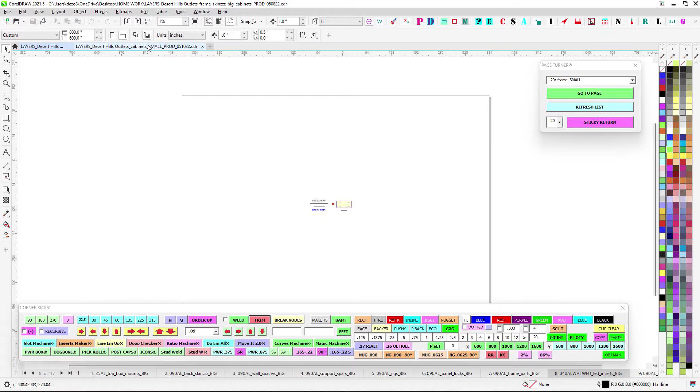When it came time to send the small ones out, I was able to fit all of those on one file. So to make the video, I'm going to work with the small frames, and everything's pretty much the same. I'll just point out the differences between the big ones and the small ones, but otherwise you can kind of get the idea on both.

So I'm going to use the small one basically. I'm not going to do a full lay of the land for the big ones, just for the small ones, and then know that it's going to be basically the same, except the big one got split up.

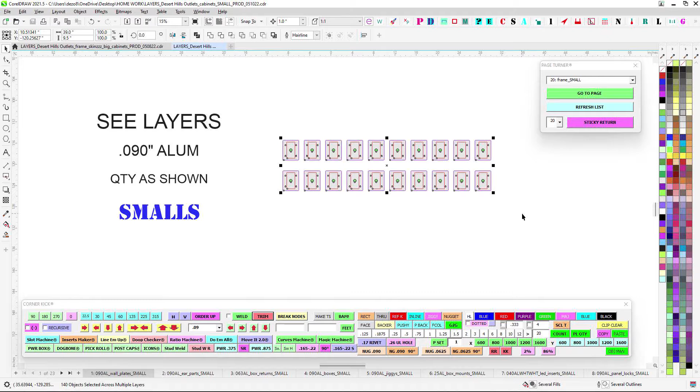So starting out, you're going to have wall plates. Again, these are going to be the same plates as the big one, so I'm just keeping it separated, but you can keep all of these together. I think you're going to cut the same 1.5 by 3, all the same, but just keep it out for both.

This is going to be the same ears that you have on the big ones, except these are in one piece because they're smaller, thankfully. So it makes it easy.

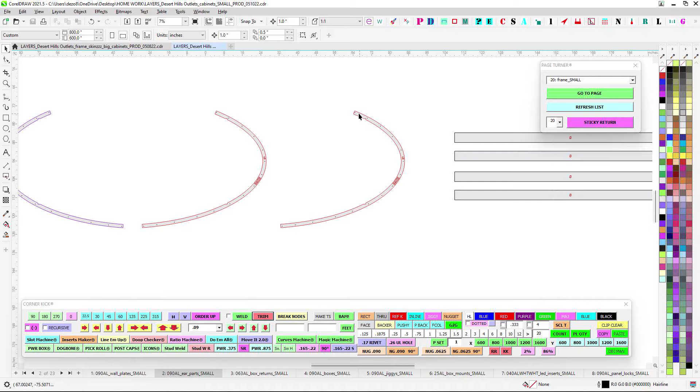Same thing though, while we're here, I want to touch on this. I don't know if I was totally clear — I know the PDF is very clear, but make sure these are lords to the back side of the main skin. Make sure don't weld on the front of this. You only weld on the back side because the front side needs to be clean, no welds, in order to be able to lords directly to the back side of the skin. So I just want to clarify that in case you didn't see that.

But anyway, so you've got your small box returns. These are for the little discs on the bottom, and we'll be going over what makes this one different. Obviously you got some teeth, so that's different than the big ones.

Same thing as the big ones, but again, all this fits on one file, so this is great. It's the same thing, except it's not seamed — it all fits in one, which makes it easier for you.

But you got the same notches and everything. And then again, we'll be going over the fact that one of these is closed in the back, and it needs to be bonded up and look nice because you can see it from the back.

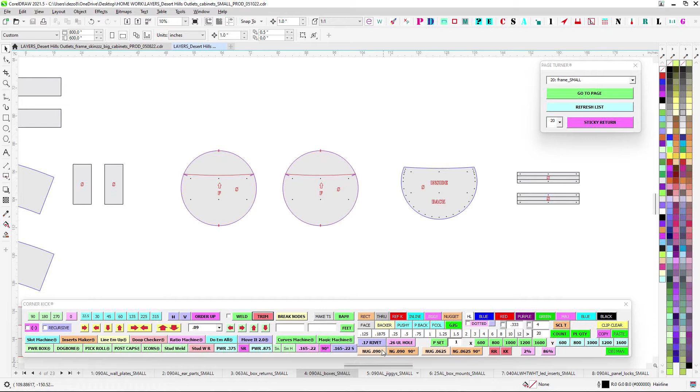Same kind of jiggies, there's just less of them because these are smaller. But the same kind of corner jigs and everything that you have on the big ones, so look for that. Same 1/4 inch that you got on the big ones.

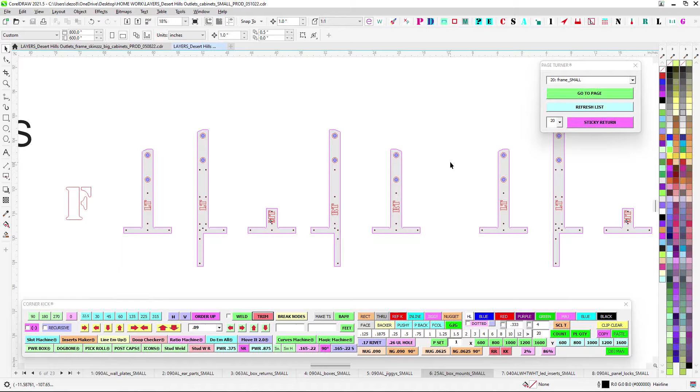I didn't really spend a lot of time for it, it's a balance whether you're going to spend all your time referencing. So obviously these are smaller. Jose, keep all this organized, and keep small parts with smalls and keep the bigs with bigs.

Same 040 white, very similar to the big ones, except they're smaller. And you're going to have the same panel locks, same thing as the big one, except these are smaller.

I think you're kind of getting the idea, you see the pattern here? Same thing, spars, there's just a little bit smaller. There's less of them because these don't need — there's not so much to support.

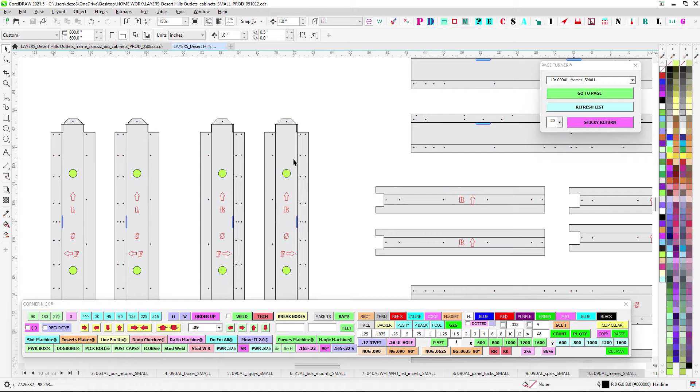And here's your main frames. Another thing that I noticed, in my haste, I do apologize for this — you're going to have to drill a hole in the verticals of the big boy frames because I didn't see that part of it. So in your verticals here, you're going to need to just put a couple holes to pass your wires through when you do your LEDs.

That's all. Sorry about that. Deduct 5 points.

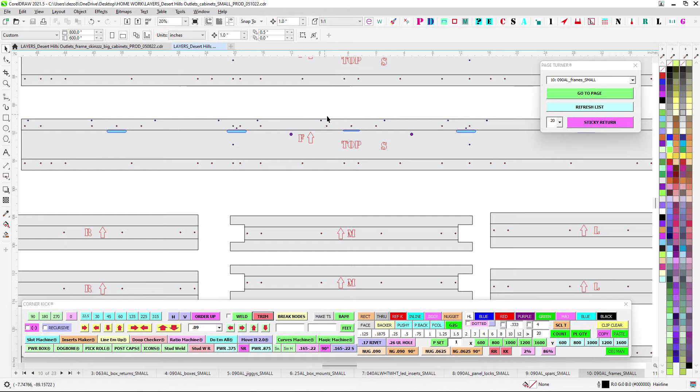But look for all these guys here. You got your verticals, your supports, your channels, all that. Look for bend scribes, faces, and make sure you got your ovals cut out. So when you go to clean them up, make sure they're there. If it's not there, it's going to have to be dealt with somehow, either reroute or you're going to have to cut them out. But don't bother prepping and bending something that doesn't have all the parts. Just make sure they're all there.

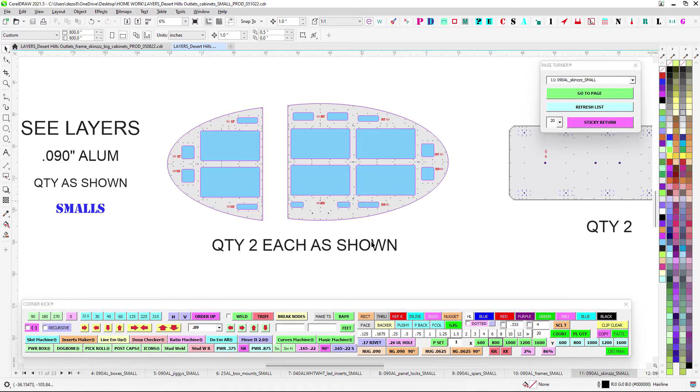Let's see. So this is better. You'll notice that the big boy is broken up into faces and skins that are in 5 total pieces because they're so big. So you have like a left, right, top quadrant, lower quadrant. These are nice because they can just be in basically 2 pieces and you're done with it.

So you got your main tracks. Again, I was waiting on sending the panels. The panels will be coming in, they are on their way, but we had to wait. So these are just the tracks, keeping out for these.

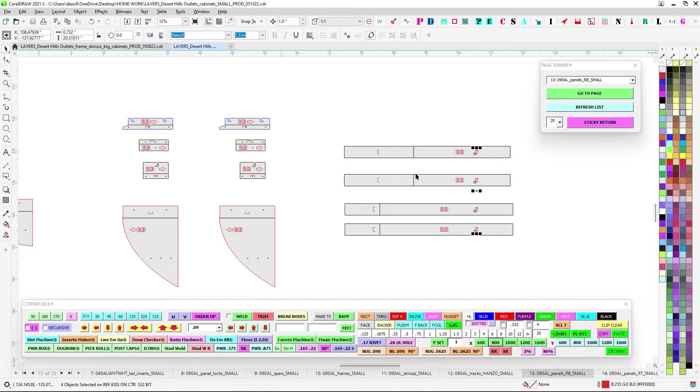Let's see. So these are the decorative panels, if you will, the ones that are weird shapes and stuff. So look out for the tracks that are with each one, right bottom and right bottom. So I kind of broke those up. I did put S on these because these might look confusing. If you just see this routed strip with that scribe, it sort of looks like the bigger ones as well. So just to keep that straight, I did do the S's on these. So S is small.

So you got the panels, you got the right top, that's the RT. Like I said, I broke it into the quadrants. This is middle top, so you can see that's the middle panel there. Look for MT, MB, middle bottom, and obviously that's where the little arrow circle goes. And then you got left bottom quadrant, and you've got your left top. So everything LT, and again, look for smalls.

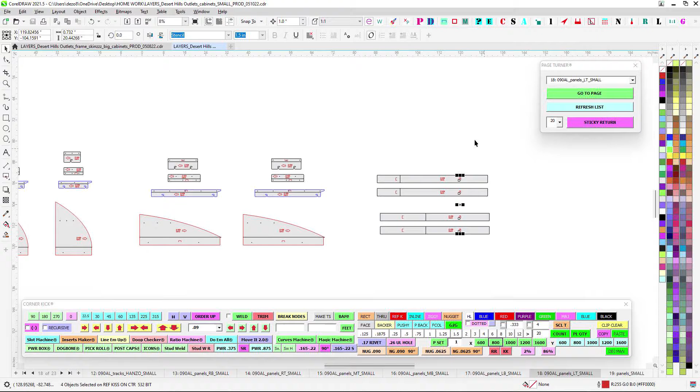That way you don't confuse the other ones, because everything's 3 inches deep, so the depth is the same. If you had a pile of these, it might be a little confusing. All right, so here's the panels. Now again, the panels here are just smaller, but the big boy, the exact same thing. So just go to town on this, or go to school on this, and then you'll know what's up.

Let's see. Do I want to talk about the panels first? That's fine, these are separate anyway. So you can weld up, let's talk about just welding up the panels. So you have your right top and your left top. You can see where that's LT over here, and you've got that right there, and then they just mirror. So I gave you one side to bend.

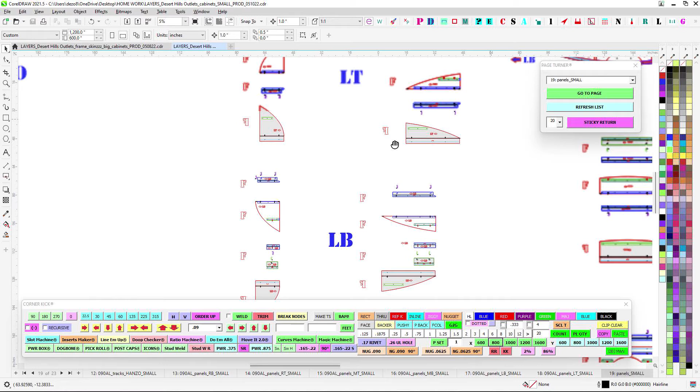So let's say your left top here, you go ahead and just bend that, and then, oh, looks like I missed the scribe mark on that one. So you just know to grab that, just like I told you on the video. So just like your other ones there. Yeah, looks like it, yeah, so I missed them.

Anyway, so you'll bend those, and then you'll just reverse channel these. You can bend that, and then I gave you an inch long and an inch long on all of these. Inch long past that, and an inch long past that, and then just cut it. So that's all good there.

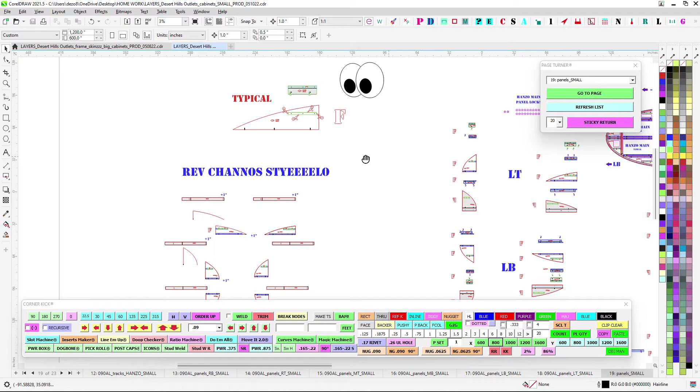And then on the ones that are this outer perimeter, you can see where I have this in green. This track is in green, and then it has the red screws versus the black screws here. What you're going to do there is, because there's not going to be, you can see this is the strap right here, and on the small one there's only 1 inch, and it's 3 inches deep, so there's no way to get to the hardware. So on the Hanzo main ones here, you're going to have the main track, and you're going to rivet it down, and then you're going to have these screws that slot in, just like the tester, right?

You saw the tester, you can mess with it, you'll see what's up, right? So all of these are like conventional. Screws are in the face permanent, and you just slide it on, clunk.

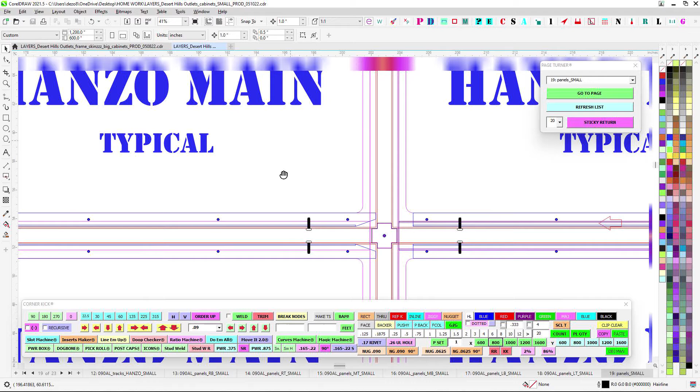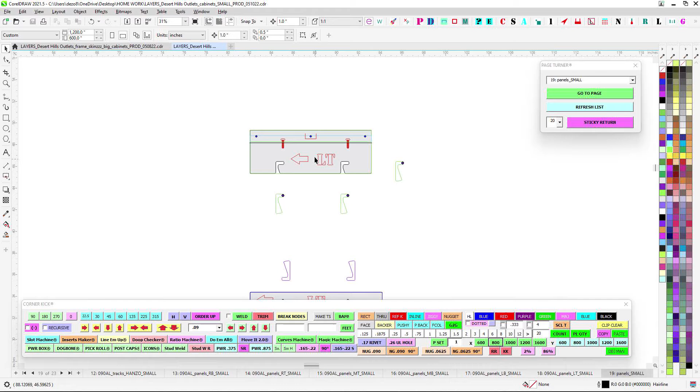But because these are basically concealed, no access, they're flipped around, so this track has the groove in it, but this track does not have the groove. The track that you rivet to the face is going to have the screw sticking out.

You'll see where this track, or this one that gets stuck to the inside, has the grooves. So the track that gets riveted to the face of the cabinet has the grooves, and this will have the screws. But the top thing here will have the groove, and the screws will go into the part that goes on. So all these ones that are green, the main skin or the main frame, will have screws sticking out. And these panel boxes will have screws on the bottom, but no screws on the top, and it'll have grooves.

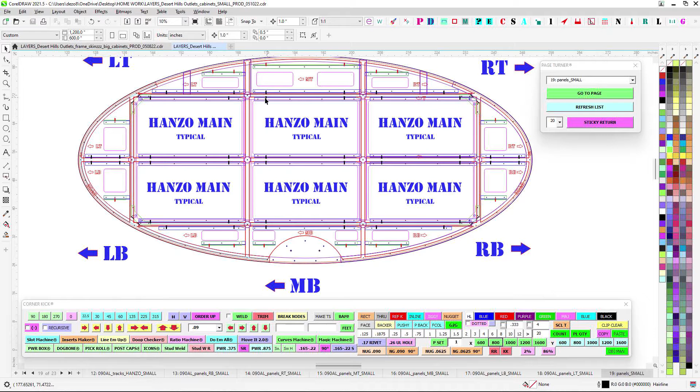So it'll be a mix-match hybrid of grooves and screws. The main panels are all screws with the grooves on the actual— I'm going to say screws and grooves a bunch more. Anyway, so that's the idea. So all these perimeter ones are kind of funky in that way.

You can see it's the outer track that gets the screw on the actual frame box, and then the panel little box gets the groove. So to show you there, all you're going to do is Cleco it, and to keep it quick—because you're already bending this and it's going to already sort of warp it like a reverse channel letter—you're good to just Cleco this in spot and then work your way around.

But just make sure the track is to the outside, right? So you'll have the track here and the track there. Just make sure you don't put it on the wrong side and have it on this side, and then we're all really sad. So just work your way through.

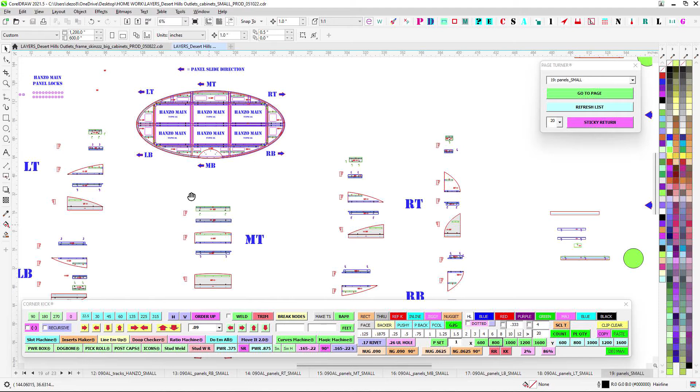So all of these perimeter ones are all that way. You're just going to clamp, bend, and then go ahead and finish it off reverse channel style, and then Cleco this in spot and kind of tack it all the way around, make it sexy, and then we're good. These are out to paint.

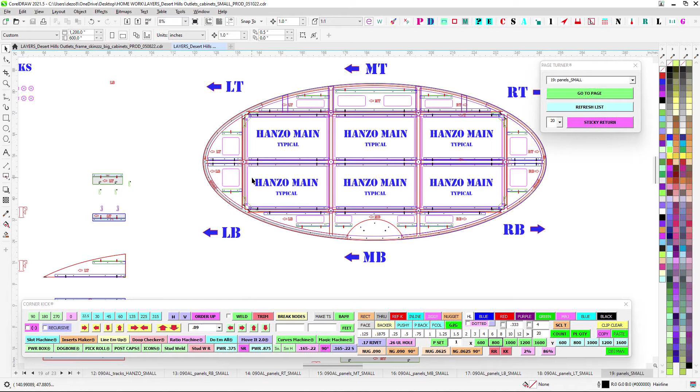And then just get all the other tracks bent. So like I say, anything green gets attached directly to the panel. So that's that. So go do those. That's for the big ones—the little ones, this one has a little more work.

You're going to bend this top side, and then you're just going to work your way around. This skin is in 3 different sections. So let's see. Yeah, so like this top one here, the middle top section, you just bend and kind of curve it, and that just takes care of that.

But this particular guy here, he's in one piece and then another piece, and then he's got these little side pieces here. So—

All right, let's talk about the small frame here. So the frame is going to be what you know, it's just going to be C channel. Just make sure all your faces poke out, your faces go to the face and all that.

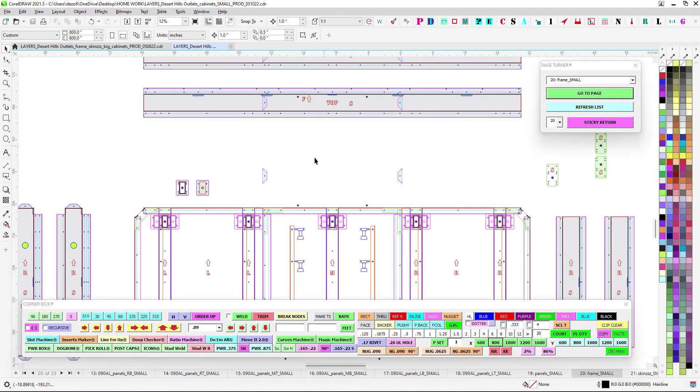And then what you're going to do is you've got mid verticals here that are C channel, and then you have your outer perimeter there. And then like we do, you've got your backer pieces that go to the back—that's where the mounting is going to happen. So that's these pieces here, but they're serving double duty.

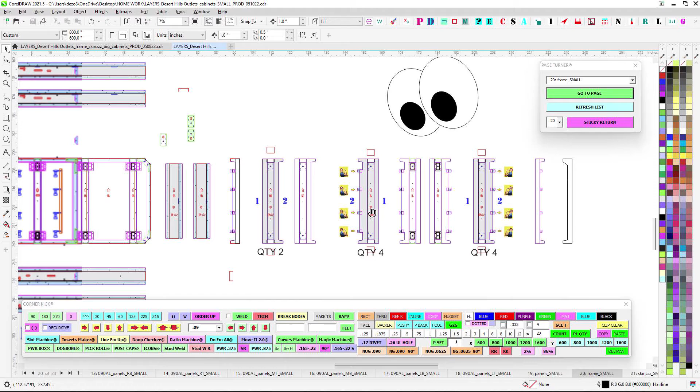Not only are they the mounting pieces, but just like Loma Linda, you're going to bend these tabs, and these tabs are going to be where you put your LEDs. So if you look at this orange here, this kind of mimics where those holes are going to line up, so you're going to bend them.

So just make sure the right side is the right side, and those tabs will bend facing into the sign. And the left side, same thing—the tabs will face and bend to the inside of the sign. So there's just a mirror.

Now, because this bigger frame is big enough, it has 6 verticals, and the 2 here take care of it. Because this one's smaller, this middle brace you'll see here does not have all of this on it—but that means there was no way to support.

So once you get this frame built, you're going to go ahead and lay the backer on. And then once the backer's on there, since there's clearance on the back, you can just rivet these two basically C-channel struts.

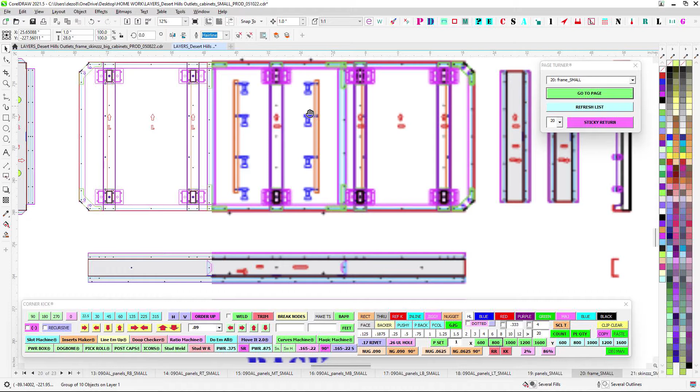Let's see, where are they? Right here, these guys in orange. They're just basic struts. But these two, once you rivet those on, just make sure this one faces in and this one faces in. That will mimic the same spacing for the white on whites, so we just have to dummy up their own little white on whites there.

But anyway, so you've made these. The backer jigs are just flat, look for the chamfers. They go to the inside, mounting holes and all that. So you just put that in there, basically like a C channel.

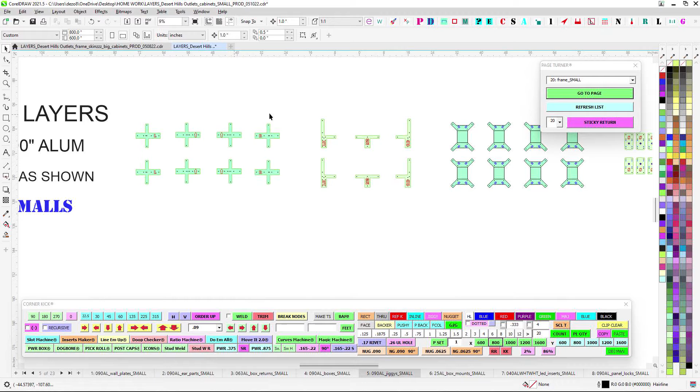So you get that up, get that built. You got two sets of jigs, your back jigs and your front jigs. Let's see, I might have to investigate these jiggies a little bit. Yeah, we got the face jiggies. Yeah, I owe you some middle jiggies, middle back jiggies, because we got these ones here, but we got to modify these. All right, so you'll be getting those. I'll get that handled.

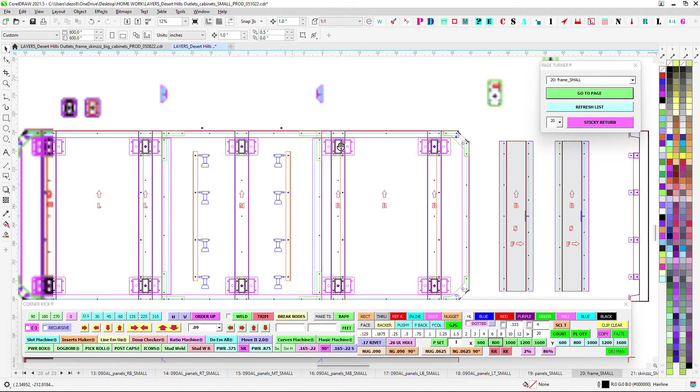So for the backer, or the actual mounting pieces, what you're going to be doing is chopping 1-inch chunks of 1.5 by 3, making little feet. This is the same for the big ones as well. I just broke it apart, but when you set the saw, get both quantities, quantity 22 here, and I think quantity 26 or something for the other one.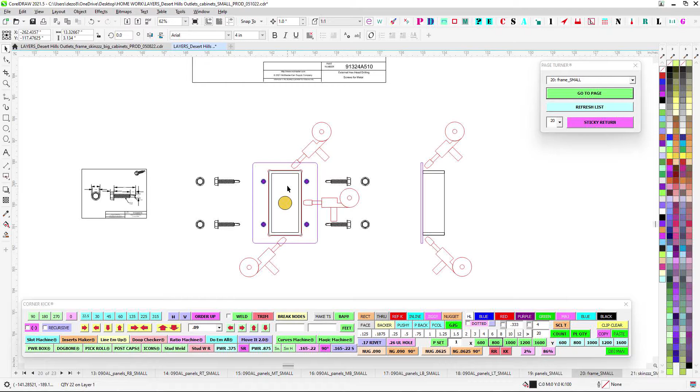So add them all together and cut them all at once, save that time. And then what you're going to do is just line them up and tack it / burn it. Don't weld all the way around, it's not necessary. Just make sure it's on there nice and strong, but it's fine because it's just going to be clamped.

So then what's going to happen is this is for install, because this is really a retrofit and there's a lot of retro still there. And the fit part is this, that's the questionable term there. So the idea is that from the inside of the sign, you will 1024 self-tap these

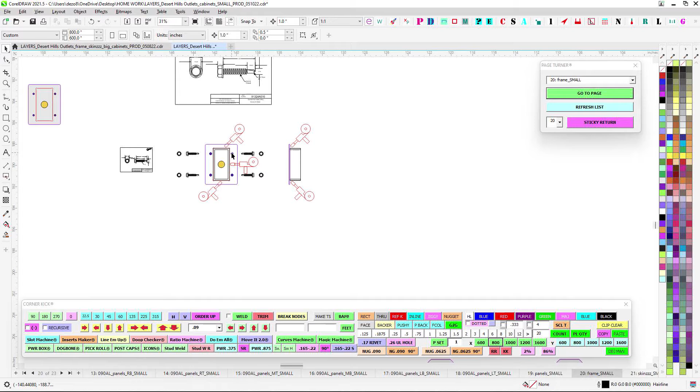legs onto the back of the sign. And then that will allow for adjustability, because when they go to put these cabinets inside the existing cabinets, there's all kinds of nonsense in there, and it could actually have a lot of stuff in the way.

Let's see, I thought I had a side view of that. There it is, way over here. So anyway, this will be your 1.5 by 3 with the 1 inch leg, and then you'll go through the strut and everything, and theoretically, if everything's cool, that lines up perfectly like that.

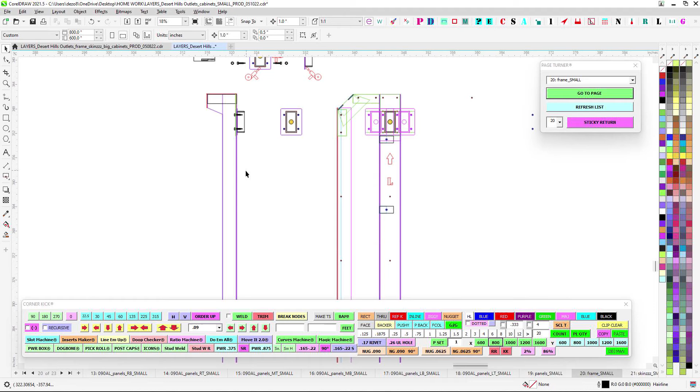But I went ahead and made 2 holes over here and 2 holes over here. That allows for this plate to slide over and reinstall on the fly. So when install goes to put this up and there's a bunch of junk or something's in the way, or there's some sort of strut or something. The reason this is 1 inch off is it has to clear over a bunch of stuff already in there that's about 1 inch tall.

So anyway, that's why we're going through this, but I went ahead and standardized it for both signs. So you're just going to weld up those plates, and theoretically they'll start where they're supposed to be, behind the mounting hole. But install will have the ability to change that placement with these holes here, should they get out there and see that, or if they have to, they can move them over even more and just on the fly self-tap it against the back.

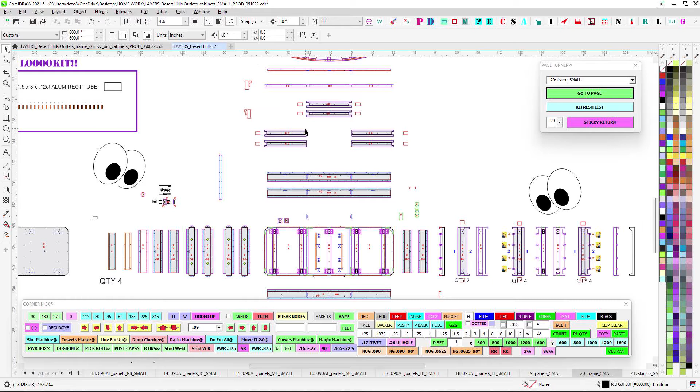So that's why I didn't want these permanently put in spot. We would just permanently attach them if we knew exactly what was going on. So anyway, just trying to give as much adjustability and modular action there. Once you get the frame on the back side all done, then your front jigs will have all the different sticky outies here, that's a technical term.

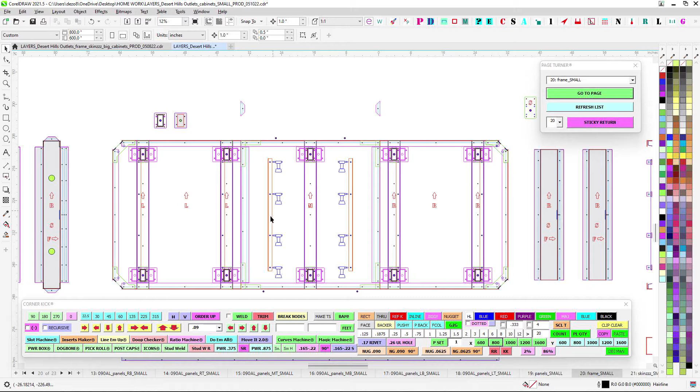The sticky outies there will allow you to mount your C channels for the faces, for the tracks. That's in the middle here. So you'll go ahead and attach those and weld them up. That way you'll have your main pieces here that go to the back, that's the main frame. In between is just a C channel on the face that allows you to put track and mount the actual face. So you work your way around there.

And then the front jigs will have the spars sticking out, ready for the spars. Now the spars are up here, they're all labeled - your left top, your right top. What this does is give the ability to support - you can see in purple right here, that's going to support the face that juts out.

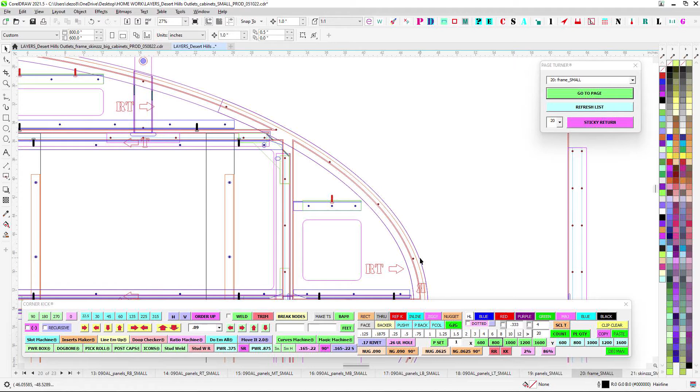So you're going to take that spar, attach it - you see it there in purple. You're going to attach it to the jig back here, and then just like the inside struts, you have one leg that's really long, so make sure you bend it one-two.

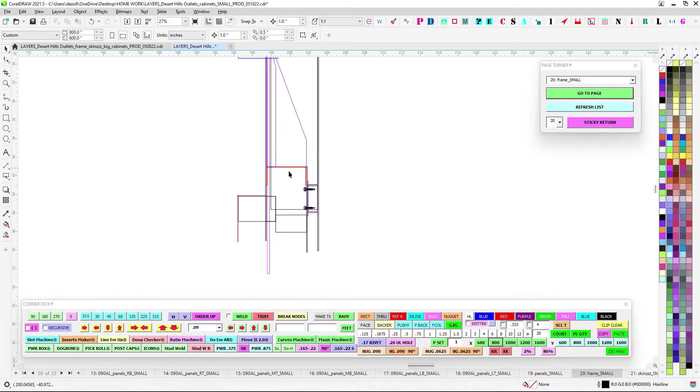And then you can see here in purple that this spar goes all the way back across the entire frame. So here's the one-by here, and here's the big long leg. Get in there and make sure you tack this nice to the frame, and that's going to give the rigidity necessary to be able to lift this thing, because you're going to have to pick it up around this perimeter, and it would just fold right up.

So this spar is going to be doing work. Make sure that spar gets attached really well to the frame. Go ahead and tack it up nice in there. And then also you can see where that supports the track and all that - these spars are doing work.

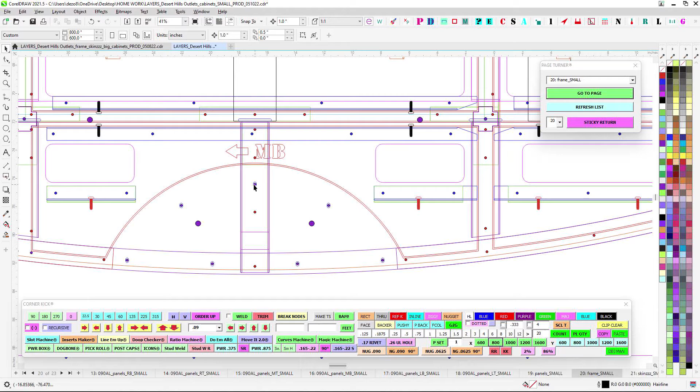Same thing here, this spar comes down, kind of supporting this. You'll have a middle spar comes down, gives structure, and you can see where it'll help support the circle, give it that strength. So anyway, you're going to do the track, you're going to do this frame, you're going to do the middle C's, and then you're going to have these spars sticking out, and that's kind of what you're going to end up with.

These spars are just beefy, they're on steroids because they have to hold up the whole cabinet up top. They'll have that weight, that's why these are beefy quarters. The rest are just 09. It's fine.

While you're here, get that in there. You go ahead and hit that up with the 5/16 steel riv nuts. You'll see where it's recessed a little bit, so it's flush, and that's how the big box will get mounted on there.

So once you have your struts, everything's on there nice, everything's good, then that's when you can go ahead and Lords on the face. And you'll have plenty of real estate to Lords like this one here - that's a nice 2-inch wide. You'll just Lords that really well.

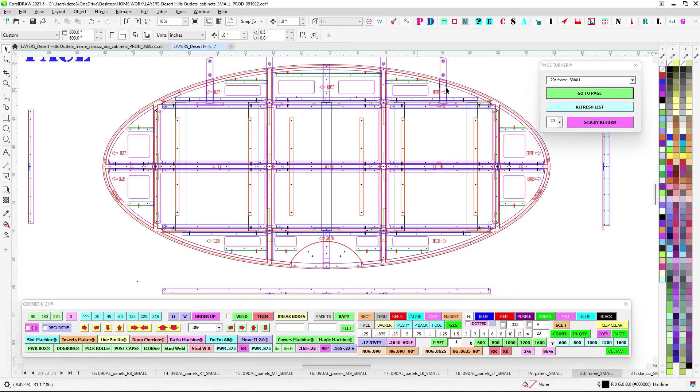Just go all the way along, Lords it up really well, all the spars, and then go ahead and lay your faces in there. Again, when you're doing the big one, it's going to be in multiple pieces, so pop Lords, have buddy system. Make sure you got plenty of Lords. Don't let it kick off on you.

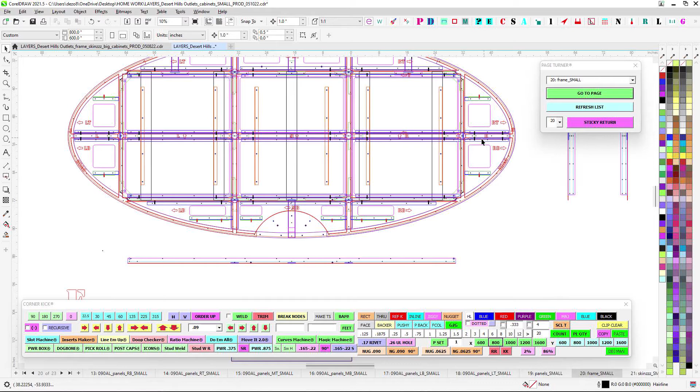We're getting into the hot season when it's triple digits, that Lords will pop off pretty quick. So just be ready, lay your piece out, test fit it first, then lay your piece somewhere so it's ready to grab quickly, and then go for it. But just, you know, you've got to hustle. So anyway, get all your skins on there.

Lords face up, like I said. And then once that's all on there, then you're good to go. Then you can start laying on the tracks.

Get your tracks all bent up, and then you can decide how to do that. But you're just going to rivet all your tracks on there, and make sure that you put your screws in first on some of these that are on the top here, because they can be kind of tight. But I think you can get, let's see, that's 6 inches, so you probably could get the screw in there okay with a gun. But if not, like these blue ones here, maybe shoot your screw through first, and then you can rivet it on, and then that way you're good.

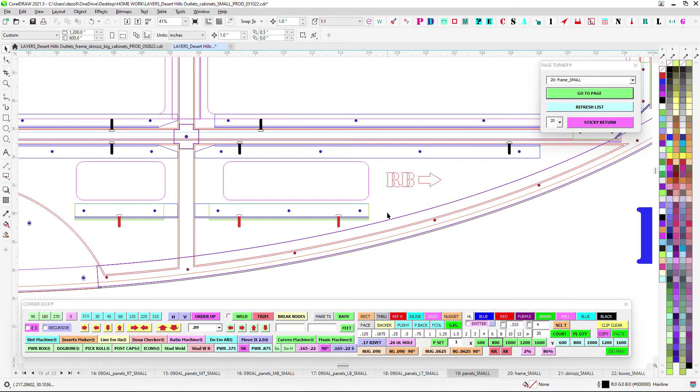Again, use those Torx ones. Bring in a bunch of those. These are that way so people aren't tempted to just pop them out, because that's not the idea. These stay in permanently.

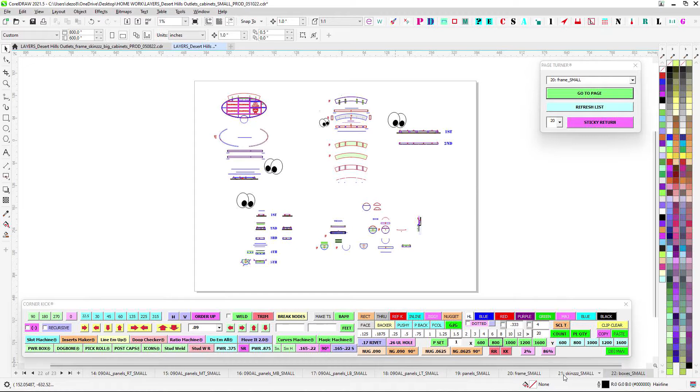Okay, so you get that. Where are we at? Take the skins, you're good there. Hammer on all your tracks, then you're good there. Get your boxes made. And then once your skins are done and your tracks are all on and everything's looking good, then you can go ahead and do the ears, I call them.

You'll have already welded those up on your table. Like I said, you'll just put them on a 3x3, weld it along the back. This is where I was hoping you'd catch that. Do not weld on the inside. It's only on the back. The 3x3 side, leave clean.

Then you're just going to Lords really, really well all the way on there. And then make sure it lines up. I test fit it, obviously, because this is going to warp a little bit. So you might have to kind of adjust it, kind of get its attention. Make sure it fits, though.

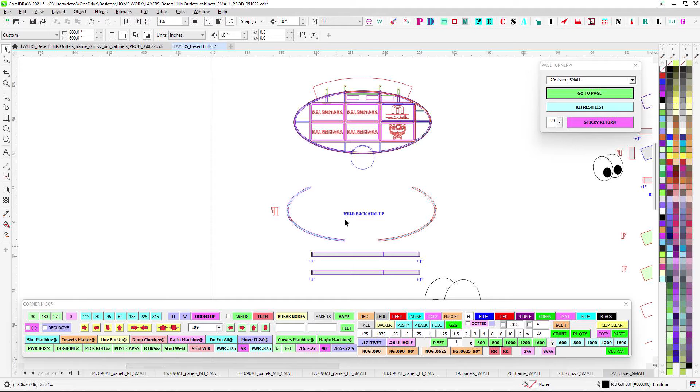And then you can go ahead and Lords these on next. So get all that skin on there, get your tracks, put these on, then you're good to go. The boxes and the circle do not have to go on in the shop. Maybe do a test fit, make sure everything fits. But you're going to send those out to paint separately, and they are also going to be installed separately. That's the idea. That way we don't have this hanging off there and getting bent or damaged.

Same thing here, it's all modular. So just like your big one, like I said in the video, you're just going to put it face down on your table. That's your first shot there. Tack it all along the back. This one's on 4x4s. And then you can flip it over and strengthen it up and get inside there and weld all around and make sure the inside seams are all welded up nice. And then that's it, box is ready to go.

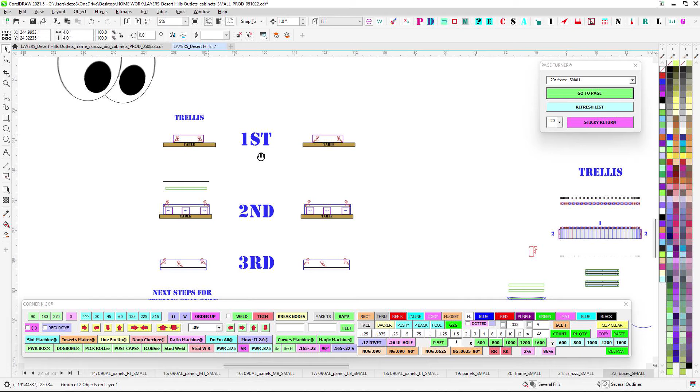Now, again, just like the big one, you've got your first, second, and third steps. So you're going to take the top skinny piece, and the face up backer, and you're just going to put it on your table, line up with the bend scribes there, or the reference kisses. Get that reference kiss here lined up there, and then go ahead and burn that on your table. Make sure it's as flat as possible, because it needs to be flush.

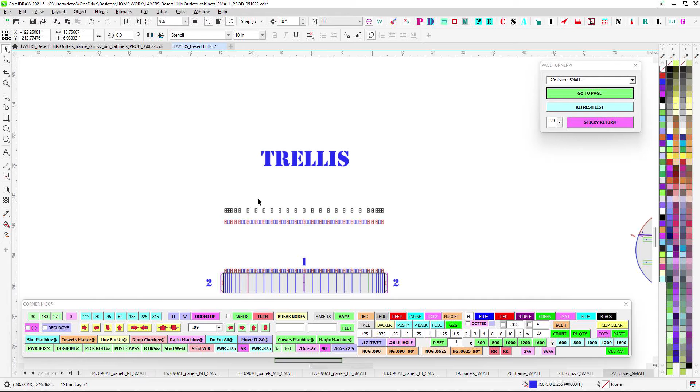And remember, it's on the outside. It's not reverse channel letter style, it's on the outside. Then you're going to flip it over and then put it on the 4x, and then that is your piece here and your piece here. And then the same thing, you're just going to line up that with that reference kiss there. And then just from the back side, go all the way around, you're good to go.

Except on this one, whichever one, it doesn't matter, but you'll have the flange coming out an inch. But you'll just have to tuck under, it's fine. But you're going to have the teeth. And then you'll do the third thing, just like the other one, flip it over, seal it up, make it nice and strong and everything. Same thing here, you'll just have flanges on the back, but treat it the same.

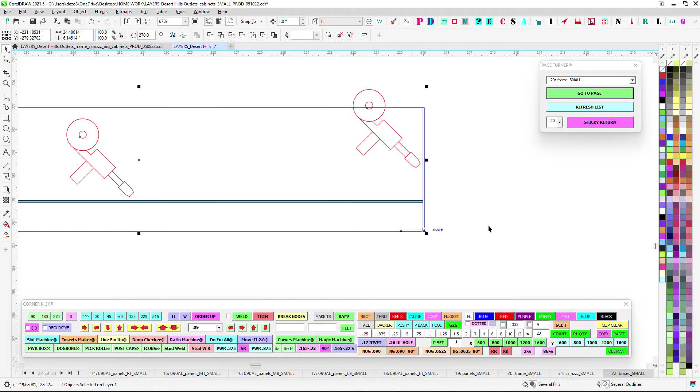Now for the one trellis one, you're going to have some C channels that are going to basically be a filler, a little support. You're going to bend those up here, and then you're also going to have the teeth on this one, versus just this one's all by itself.

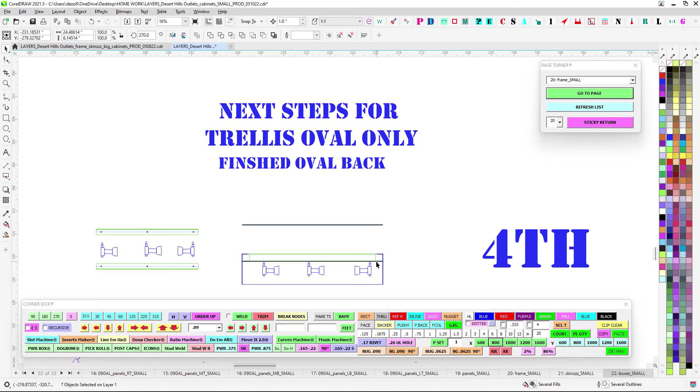You can rivet from the inside, again trying to save lords and all that. You're going to rivet from the inside and make it on the back side, and then you'll see where the flange meets up with that, and that gives you an overall place to lords everything.

So you can see where that strut's there, and then you'll have your perimeter teeth. So what I would do is just grab the backer, and you can put lords across these really good. I would just lords this really good on the backer itself and smush all the way around, and then put it on the back side of that, and then that gets bonded up and cleaned up.

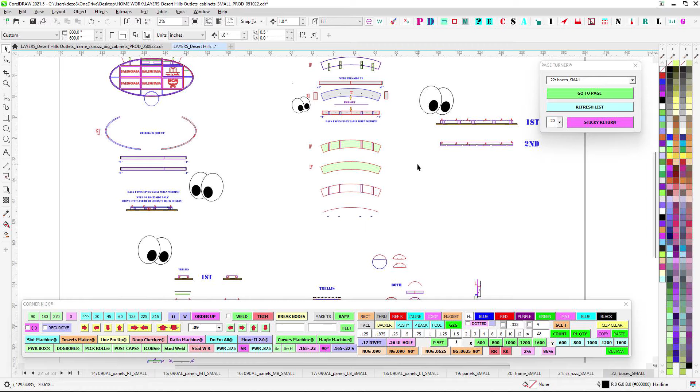So let's talk install. There's a couple things, but we've already talked about it. I already talked to Jonathan. We still need to decide the best way to do a pattern, because this thing's 4 something inches and then you have an inch back with these things.

There's no real way to make the oval, because the oval sits on the face, so the paper pattern of the oval doesn't do any good. So maybe do a paper pattern of this rectangle with these holes, and then maybe overlay it on some really thin plywood or something, or some Sintra, just burn some Sintra, and then spray it down.

And then you can set that in there, and it'll at least give you, you can set it inside. Like I say, that's the orange there, that's the existing. So at least you can maybe get it, kind of measure it from there to there, and get it where you like it, and kind of measure it from there to there. And you can get this rectangle thing kind of centered in the oval, and then get it level.

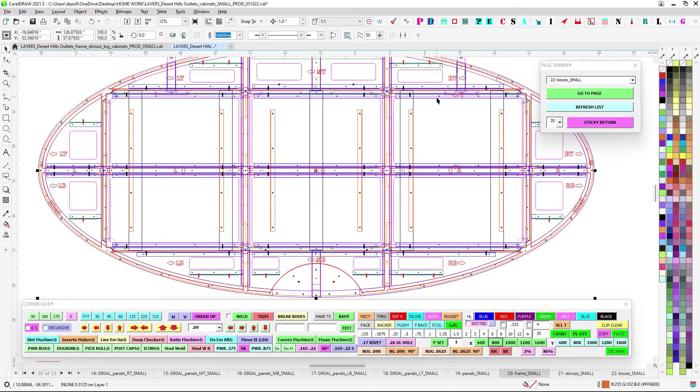And then you can burn your holes through here and here. Now the 3 that go on the wall, excellent, it goes all the way through. You burn through, bring some all thread or whatever. The one that goes in the trellis, I've noticed that you'll have the framing all the way around, and then it attaches to its framing and whatever.

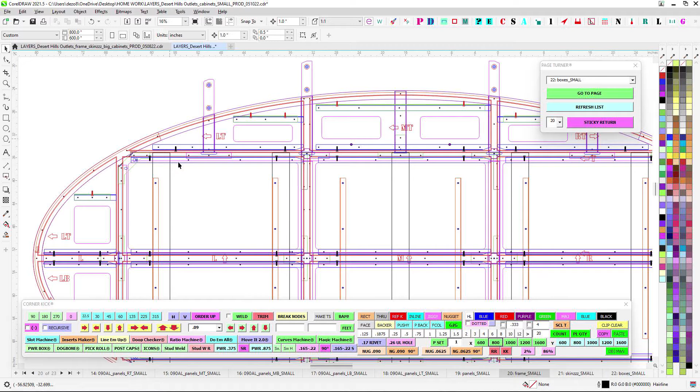But the backer itself, you're going to have to make that decision when you get out there, whether or not that backer is going to be beefy enough to sort of hold it all up. I was thinking that where the existing frame that's 5 inches deep gets close to this framing, because you're not going to see it since it's up so high, you might just try to help support this whole thing. So rather than just relying on the back bolts and then the backer itself, if you can get some sort of bolt or something, or even self-tap from this side through their framing and just down and dirty catch our framing, and at least get some screws or a through bolt.

What I was thinking is you could drill through with the same half inch, because you're going to be using half inch hardware to mount this. So if you bring some extra bolts, because like I say, this is only 2 inches, so it's right there. If you brought some like 3-inch bolts or even 4-inch bolts, and if you were to come through this side through their existing framing and just burn through ours and slide a bolt in there, then that way you can at least get a washer and a nut. And this bolt here, wherever it fits.

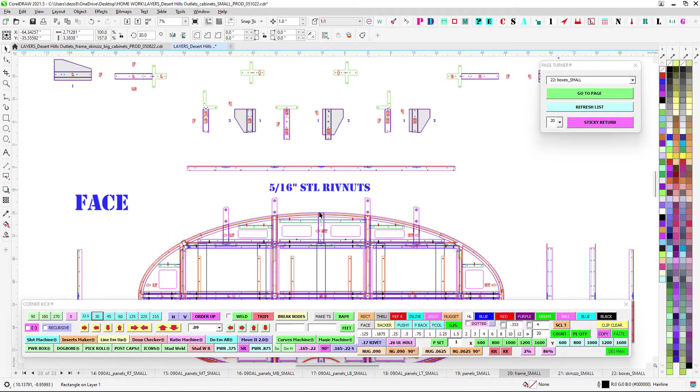But at least at that point, we have the vertical shear strength on the backer, but then we get some sort of hanger additional help here and here. So like I say, the jigs are flat in one piece in that corner, so you could just randomly get your gun in there, it doesn't have to be pretty. And then make sure it penetrates through a spot in their framing that maybe you could work a half inch bolt through there, and then throw some washers and stuff. That way we'll have hanging support directly onto the main thing.

Like I say, these frames without the boxes aren't that heavy, they're about 100 pounds. But once we get all these panels in there that have all the backed up plex and stuff, these things are going to be relatively heavy. So it's just the trellis one, right? Because you're just relying on that back, but maybe a little augmented there for the trellis one. Otherwise, I'm confident the ones that are on the wall are going to be fine. So it's going to be a little bit challenging for install, as always.

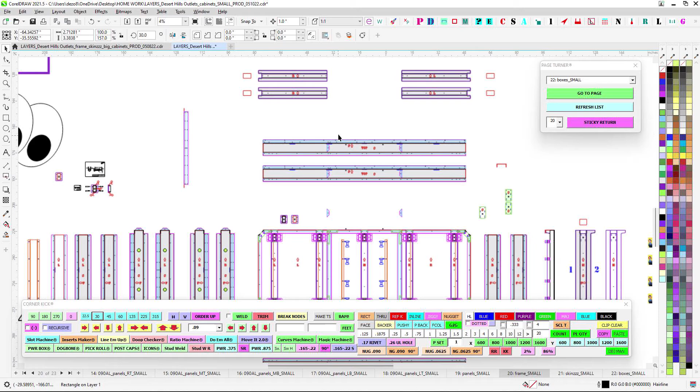So that's it for those frames and everything. I think you guys got it. It's easier if there's any questions, hit me up. Don't start chopping on things and, oh, this didn't fit or whatever, just hit me up. I noticed there's a few little discrepancies. Like I said, I forgot the holes on that.

It looks like I owe you back jigs here, so I'm going to send those right now. But just communicate, hit me up. Honestly, I'll be there in 10 minutes if you need me to look at something or whatever.

So let's talk about the panels while we're here. I know it's a long one, but this is it. We waited and waited and waited, and we finally got confirmation on the panels.

Speaking of panels, one more thing. These are fine though. Bend them up, shoot studs, and then what you're going to do is just weld it up. It's fine, that's it for these. You've got faces, big and small, but you're going to have an on-center reference kiss on all these, and I'll show you what that's for.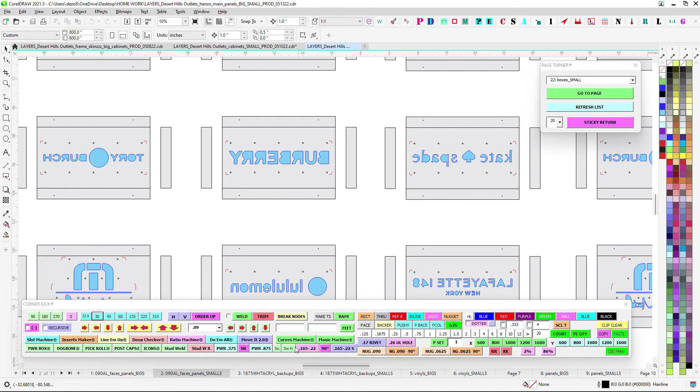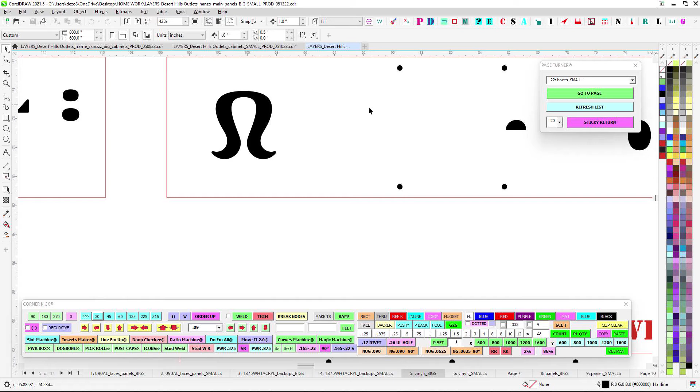So we're going to do the acrylics. The acrylics are going to be routed face up. I know they're usually routed face back, face down with the backers when we do push-throughs, so this is for reference. The way this is going to work is because the centers are so small, and we're doing backed up 09, it's really not going to work, especially on the Travis here. There was no way to get in the script of that.

So what we decided to do is a satin vinyl that's going to match the Matthews, and these are going to be applied directly to the backers. We haven't done this, but that way we're all good to go. That's why it's important that we follow the reference kiss.

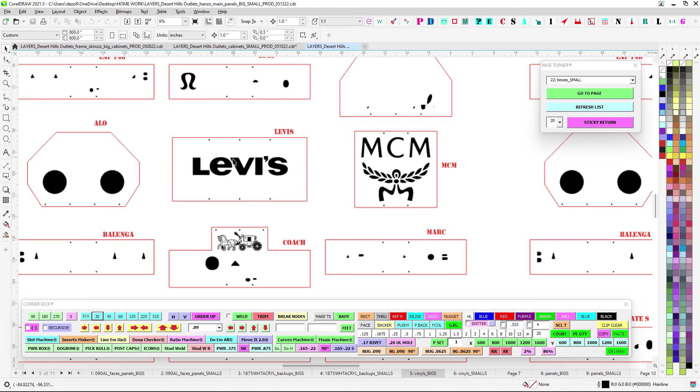So when you go to put these in there, I know you have a little bit of room to play, but you're going to be using that, because hopefully Pete and Ma are going to pay attention to this. They're going to have these little reference things here, and that's going to allow them to register these directly and perfectly what they need to be, and then it all lines up. So that way MCM all this matches up nice. Especially - this is what the problem was - how do you do that with push through or whatever? So it was almost forced to do the vinyl. But again, this matches. So anyway, so that's that.

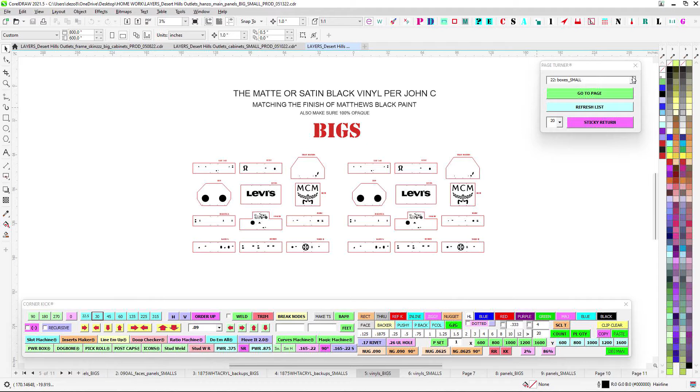Let's see, I'll talk about this for Pete right now. So first shot, here's the idea - I already kind of talked to him on the phone - but this is the first time we're going to be able to turn off layers. We're trying, just like we do with route, we've been doing it forever. It's like, why didn't we do this before with first shot?

So what I'm doing, Pete, is you're going to be able to shut off the information here, so you hide that, and then this is just what you're supposed to plot. But you can see, if I were to send this over, how would you know where this one big panel is, or is this all one big panel? So what you can do is make the info - you see here it says info only, do not plot - you turn that on, and this shows you which one's which.

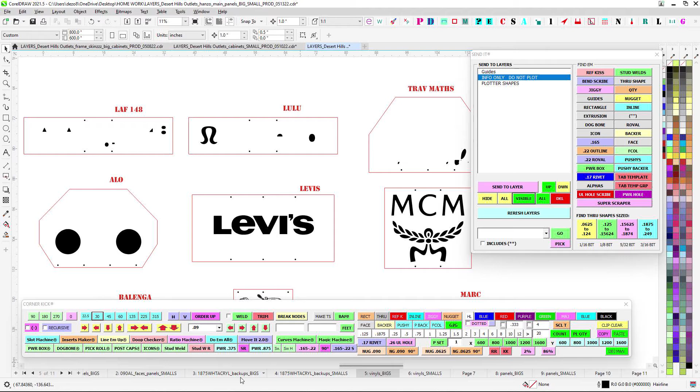Now Pete, what you're going to do is take these, and this will be your reference. So this is the Alo, this is Levi's. You're going to take that acrylic, and then take these and match them up. What I'm thinking is if you could use the clear transfer paper, these are going to be your registration marks. These are 3/8 holes that match our stud holes. So you're just going to find the Levi's there.

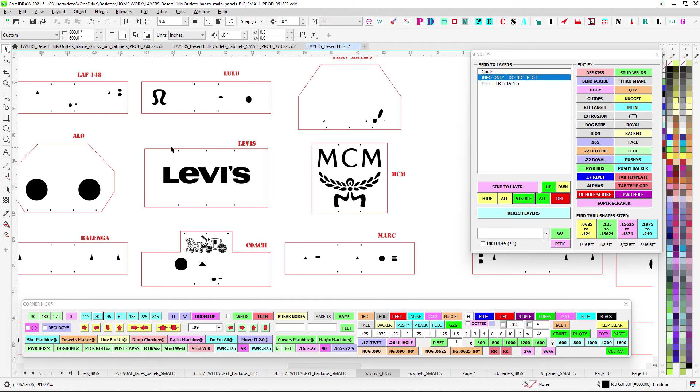This is for the bigs. Let's see, the bigs has the Levi's. So you'll take the Levi's there, and you'll see where these holes here match up there, and then you'll take your clear transfer right there, and line up. Don't crash - there you go. You'll line up those holes, and that's your registration mark. Then that's it, lay it down and burn it.

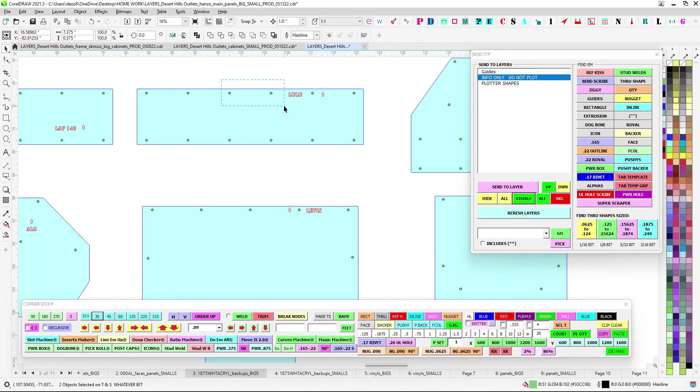You'll see where Travis - I'll do you a solid there, try not to waste too much material. You still have this shape for that, but that's just for your information. You hide that layer - this is all you need to route or plot. Then you'll just be using the bottom holes of Travis Matthews. Otherwise, it's worth it on these. So let's look for Lulu, look for whatever that is, 148, Coach - just keep an eye out.

There's your Marc Jacobs, your Tory, whatever, Burberry, and stack them up, do all your vinyls, do them on the clear transfer if that works for you, or however you guys do it, your Balenciaga and stuff.

But when you open this file, it's going to be a DXF, not an EPS. It's going to be a DXF, and then you'll see, you can go into, I think it's Project Manager or Project something. You got to find it. But anyway, if you haven't messed with it, I'll be over there. We can show you what's up.

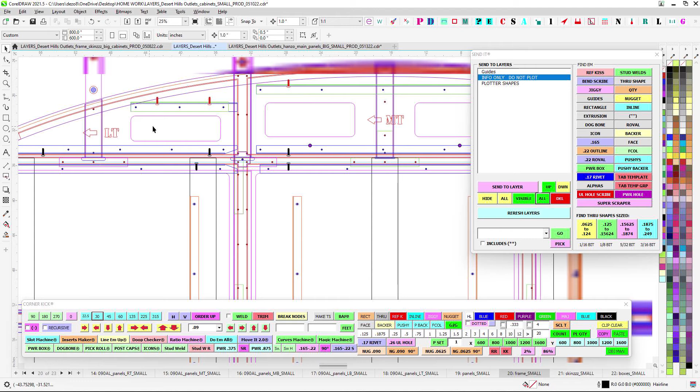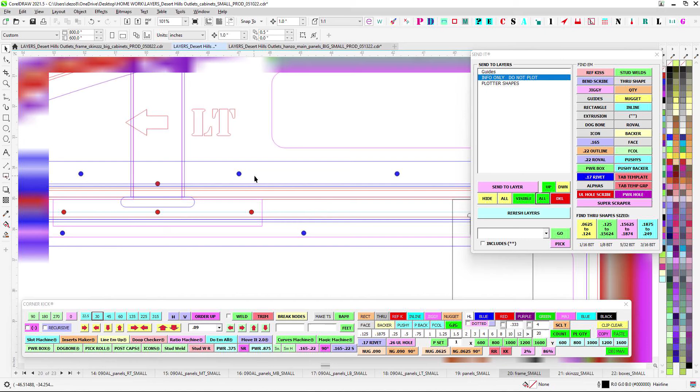Since you're not going to have any sort of hardware or anything accessible, all the left tops and the, you know, that's the direction of slide. So you start over here and you're going to slide it that way. When you go to install all these panels, you'll see these markings. You'll look on the inside of the panel and it'll say left bottom, and then you'll go over here and there's left bottom. So that's your direction of slide. You'll start over here, lock it in, slide over, and it'll stop. Bonk. Just slide it till it bonks. It locks into place that way.

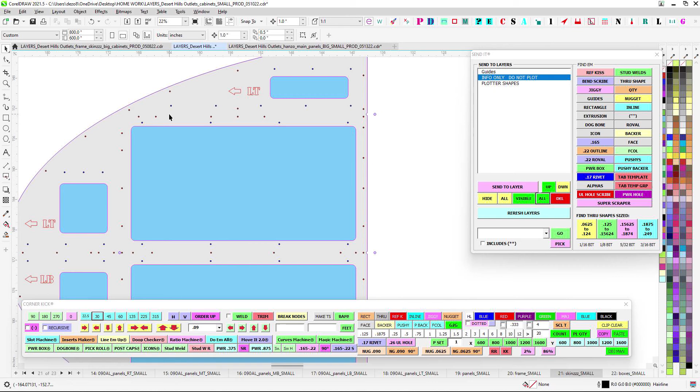Now, theoretically, it could just sit there, but you never know. There could be wind, there could be a little earthquake, and things could start shifting. So the way we're going to lock these into place without being able to access any sort of hardware is with these panel locks. In between each of these panels, you're going to have these little squares and these little crosses. Go to the very front, where's panel locks? There. So the big ones and the small ones will have these. These will go in between each of the panels and you'll just do a number 10 right in the middle. Since these channels are 3 inches deep, you're hardly going to see these because they'll all be black and these will be 3 inches deep. It's only 1 inch apart here.

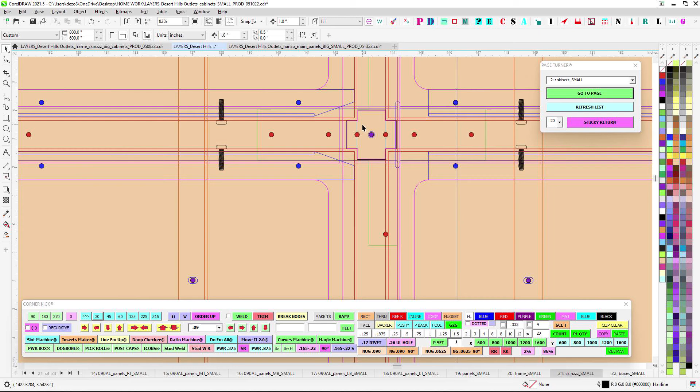So you're going to put all your panels in place, and then you're going to take these little squares and stick them in the intersections and nail them down. That's going to keep things from sliding around, and these will be locked in place.

So you only have to do, you'll have 6 here and then 1 here. All the way up like Main Street here, you'll have 4. And then you'll have 2 up top and 2 down here. These panels will be all locked in place and they can't go anywhere. So it's a nice compromise.

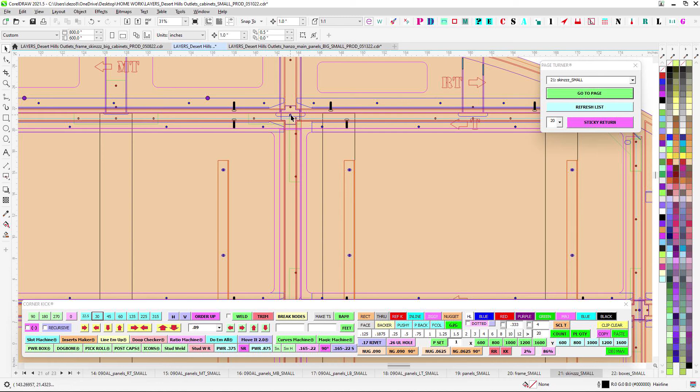All you need to do is one of these. I did some extras, I believe, but just make sure you don't drop them or lose them. Keep that in mind, look for these things. That's a very important part to finishing this. That'll be the last thing you do. You'll slide on all your boxes and lock each of them in place. That way, if you ever have to service it or if they change the name of this place, you just need to pop these two and you can take this panel out, whichever way it slides. You just slide it out, good to go.